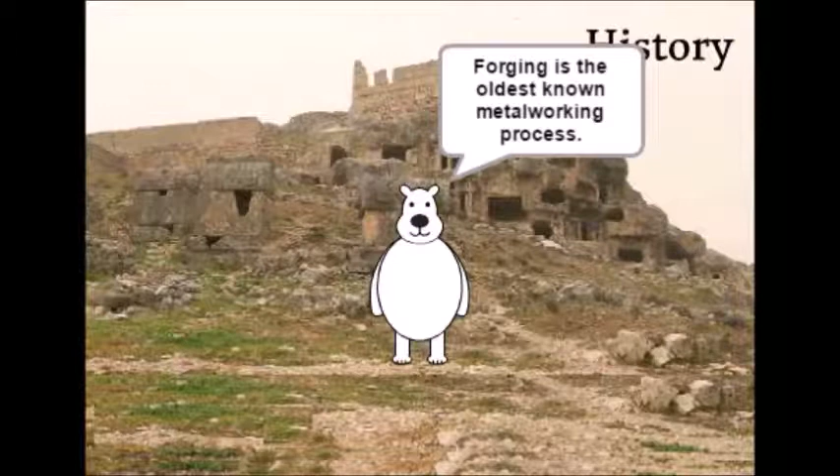Forging is the oldest known metalworking process in the world. It was used as early as 4000 BC to make coins, weapons, and tools.

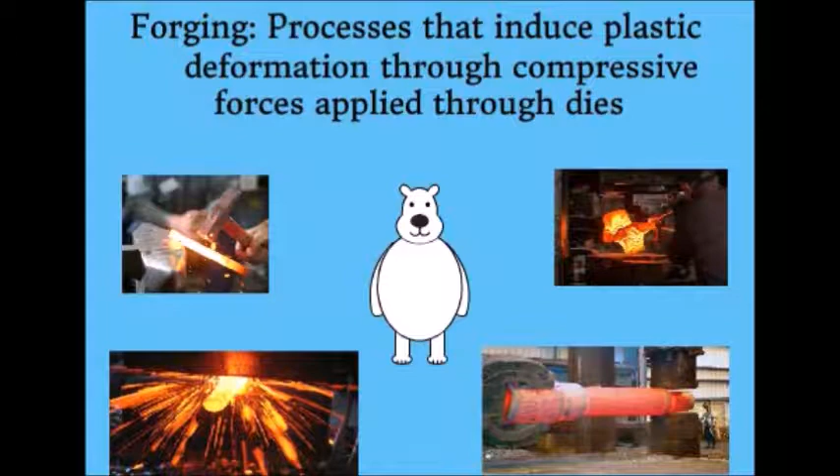The definition of forging is a manufacturing process involving the shaping of metal using localized compressive forces, usually using a hammer or a die. Forged items vary in size. They can be as large as landing gear for an aircraft or as small as kitchen knives or scissors.

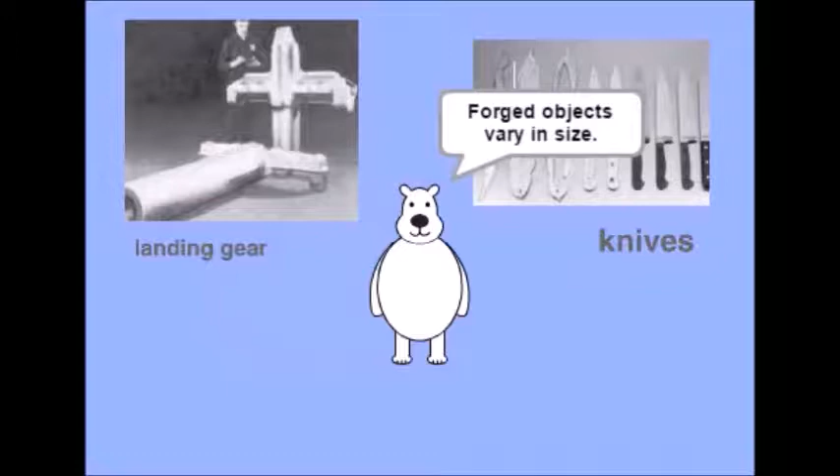Forging can be classified by temperature as hot or cold. Hot forging is classified as when the metal temperature is heated above its recrystallization temperature. Below its recrystallization temperature is cold forging.

Cold forging is generally preferred by manufacturers because it requires little to no finishing work, has better dimensional accuracy, and the dies used have longer lives. These all reduce the cost of production for simple shapes and high volumes. It also increases the strength of the material through strain hardening.

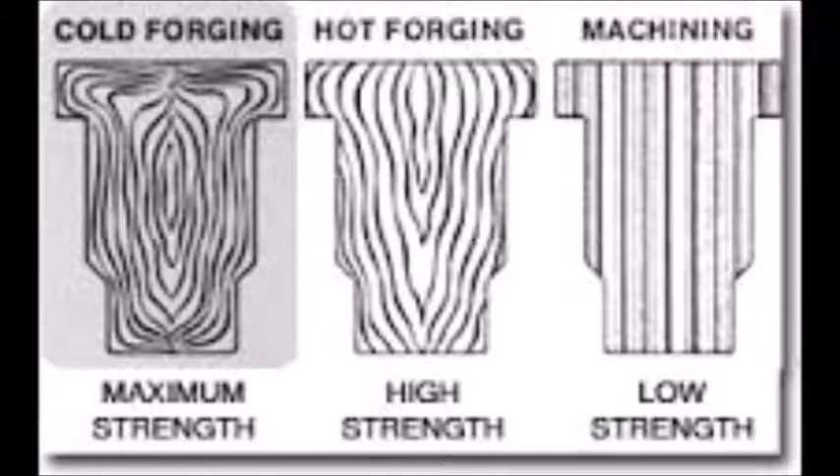Hot forging is preferred for some applications because components produced by hot forging possess increased ductility and optimum yield strength, because the heat prevents strain hardening from occurring.

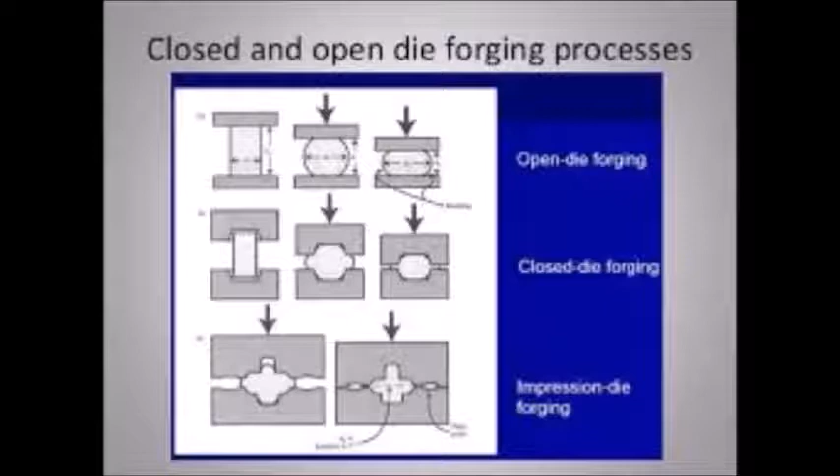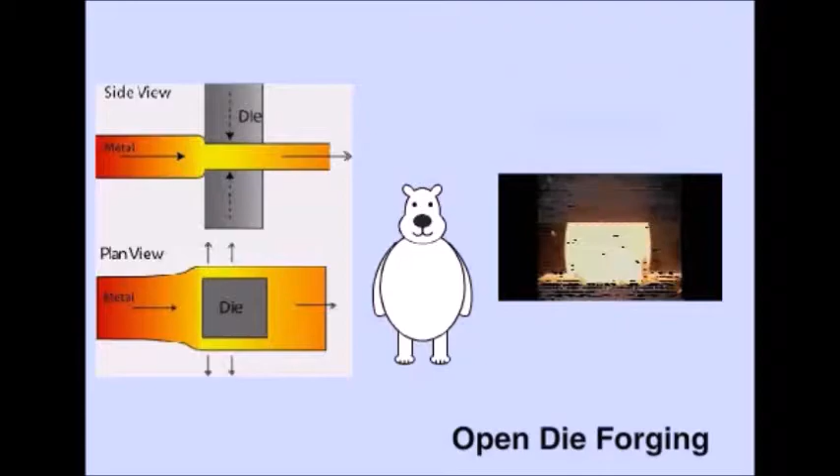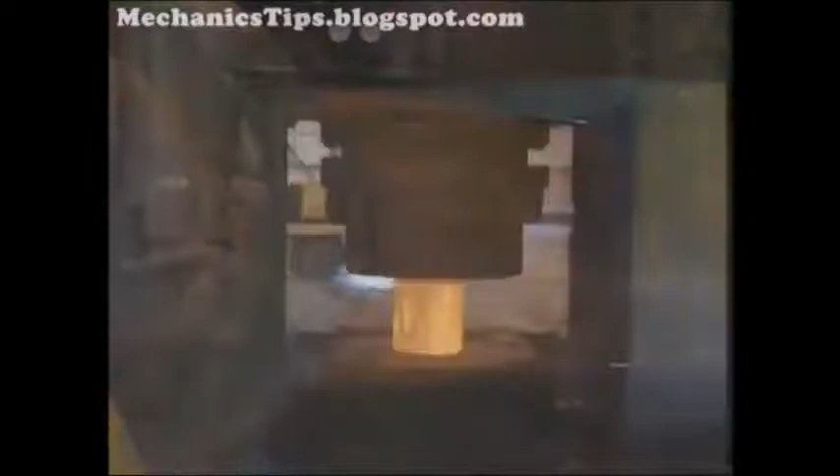The mechanical press used to manufacture these components operates on a horizontal plane. The dies are split to allow material to protrude between the mechanical press. This is the most commonly used forging process.

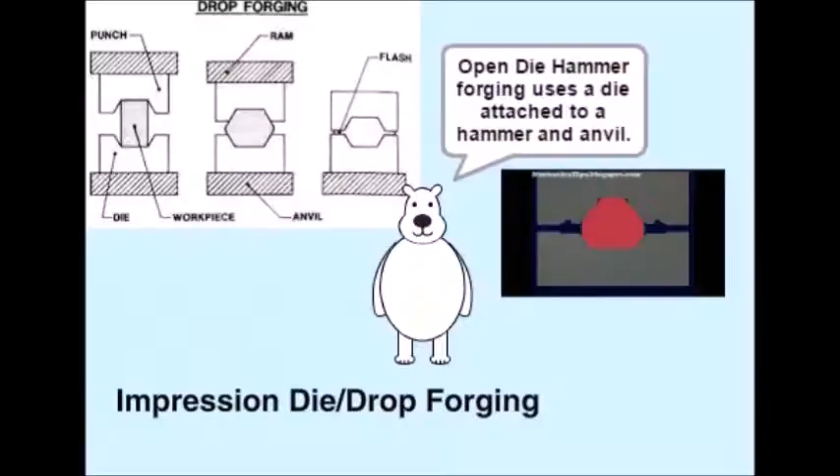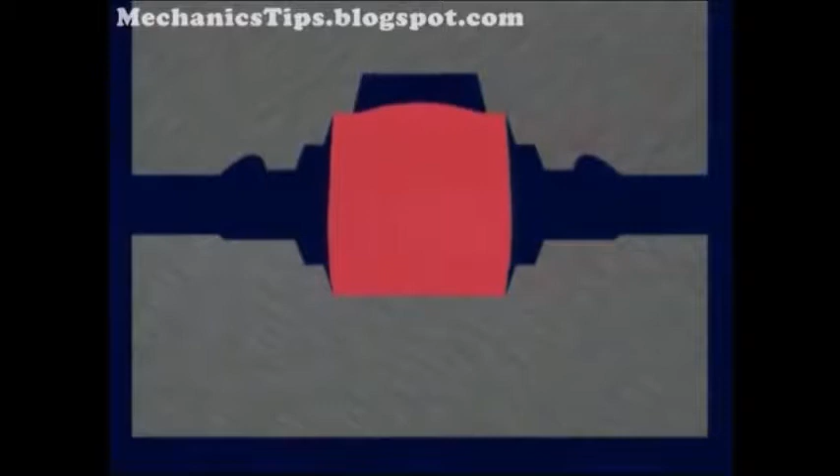Impression die forging is a type of closed die forging where a steel billet is placed on a lower die block while an overhead die or ram hammer drops down, forcing the metal to fill the two die blocks. Excess metal, called flash, is squeezed out of the die and requires additional machining to be removed at the end of the process.

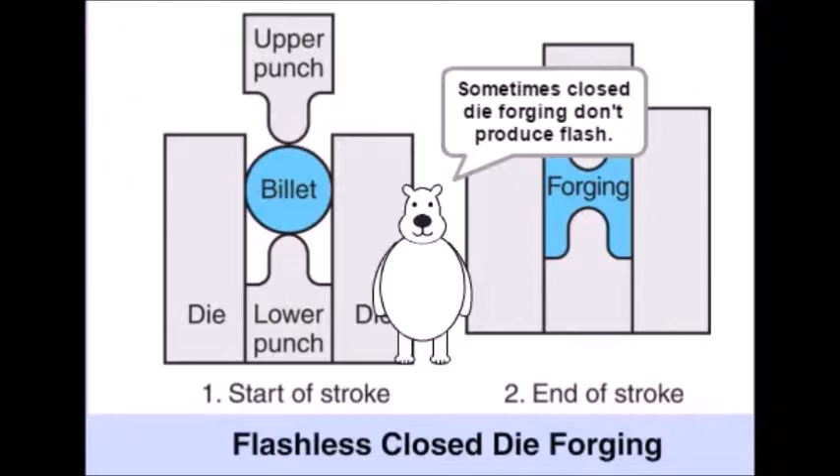Precision forging, or net-shape forging, is a closed die forging that requires little to no additional machining. Cost and waste of post-forging operations are minimized.